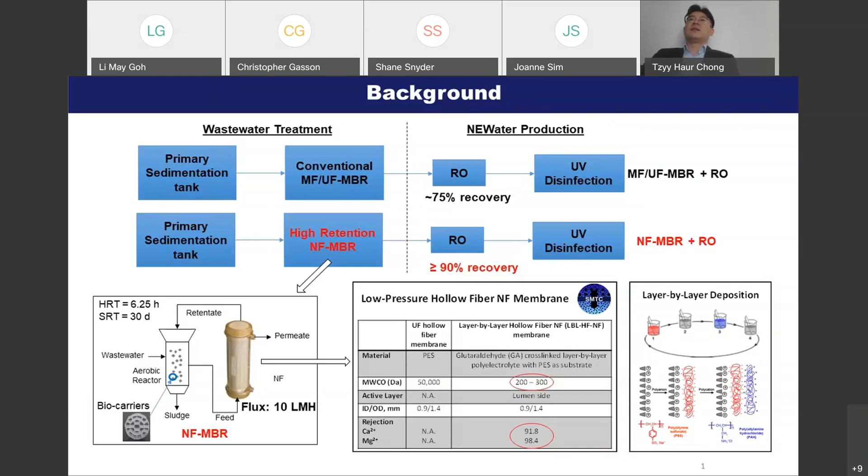So there are two parts in this work. The first part is actually laboratory scale studies where we optimize the NF-MBR. We improve the NF membrane and module for wastewater applications, assess the overall fouling reductions of the system, and perform some techno-economic analysis.

In part 2, which is the current stage we are in, we demonstrate this technology where we scale up the NF membrane as well as demonstrate the NF-MBR at pilot scale.

We have done a lot of optimization work, so below are the optimized conditions of the NF-MBR. The membrane is in an inside-out configuration, used in external mode because we still need to apply a low pressure of about 1 to 2 bar for operation. This hollow fiber membrane has an internal diameter of 0.9 millimeters and external diameter of 1.4 millimeters. This has been optimized to minimize clogging of the hollow fiber when operated with wastewater, and the flux is set at 10 LMH.

The filtration mode we use is intermittent operation with 9-minute filtration and 1-minute backwash, and two-phase flow is applied. In the bioreactor, we actually use a biofilm carrier such that it produces a very low MLSS of less than 1.5 grams per liter. The HRT is set at about 6.25 hours and SRT is 30 days. The feed water is municipal wastewater collected from a domestic treatment plant in Singapore.

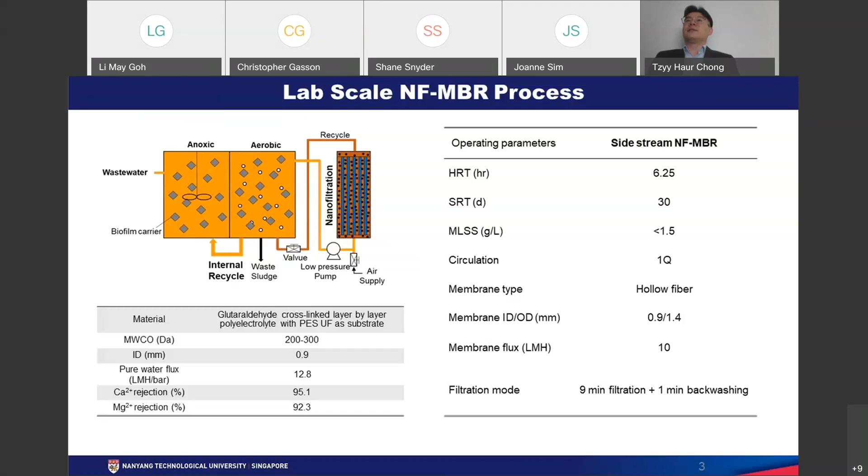This NF-MBR, of course, experienced accumulation of salts such as calcium and magnesium. However, it did not impact the biodegradation efficiency, which removes more than 90% of the organic compounds. We also checked the activity of the biomass, so it does not impact the operation of the bioreactor.

The permeate of NF-MBR has superior quality in terms of DOC removal. It consistently shows a concentration of less than 2 milligrams per liter. Also, it has lower protein and polysaccharide content.

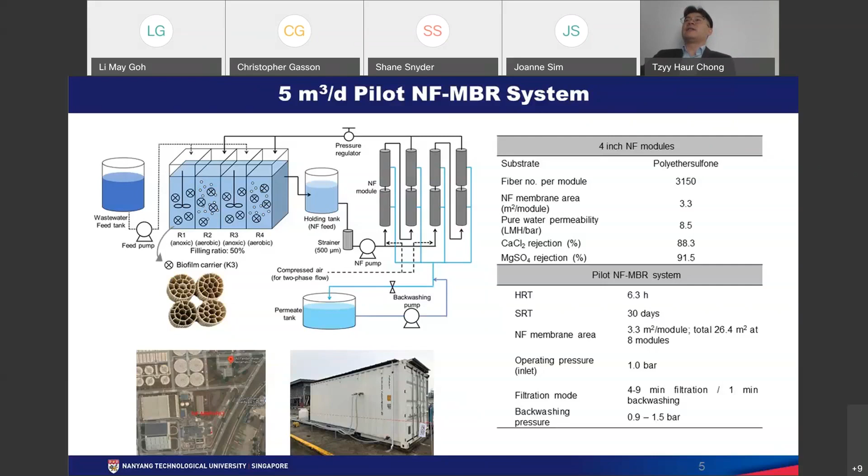We are still in the stage to actually take this permeate of the NF-MBR and run it through the RO.

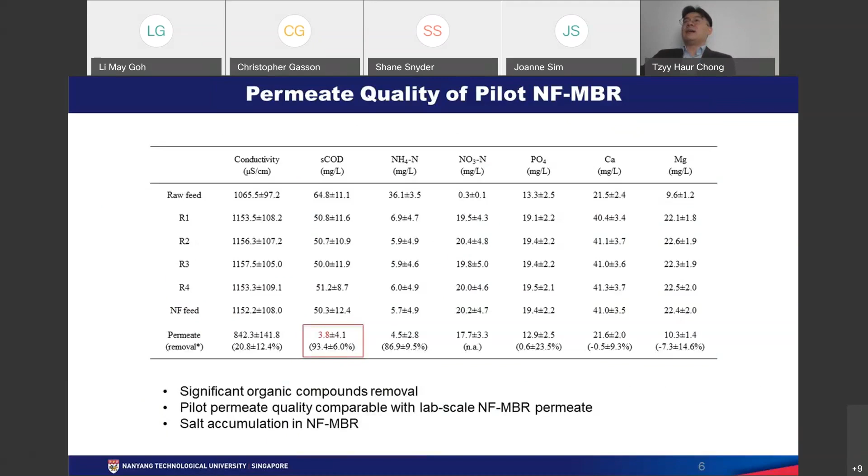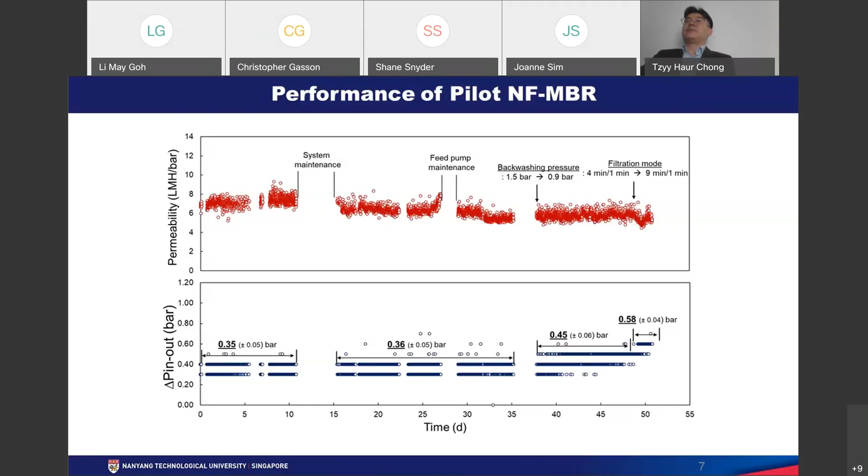So here, the higher energy is due to the RO, because when we want to achieve higher recovery, the osmotic pressure is higher. So it's known that you need to apply more energy in the RO stage to achieve higher recovery. This is the preliminary data we have, and further verification using pilot data is required.

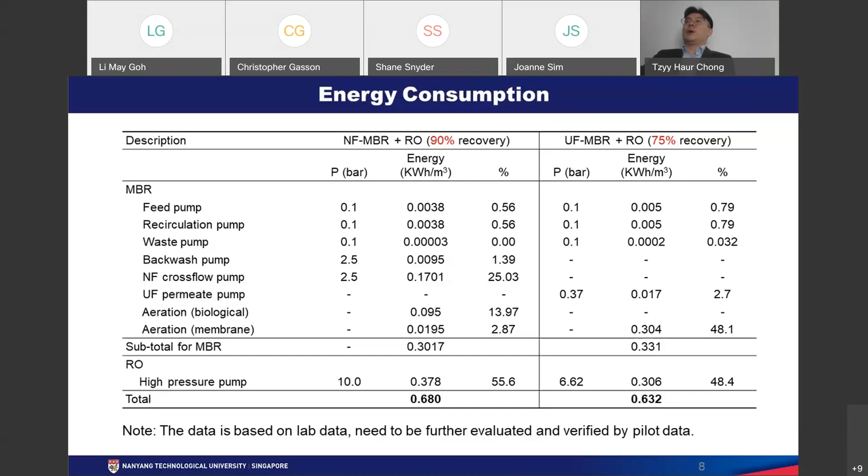So in summary, the Nf-MBR achieved higher organic removal than conventional UF-MBR. This allows the RO to be operated at recovery of greater than 90%. So Nf-MBR plus RO is a feasible option for high recovery water reclamation. Other potential applications, apart from water reclamation, include industrial water recycling, with significant improvement in micropollutant removal.

The benefits you get are high water recovery, lower chemical usage, and less energy consumption associated with RO membrane fouling. It can also increase the membrane lifespan.

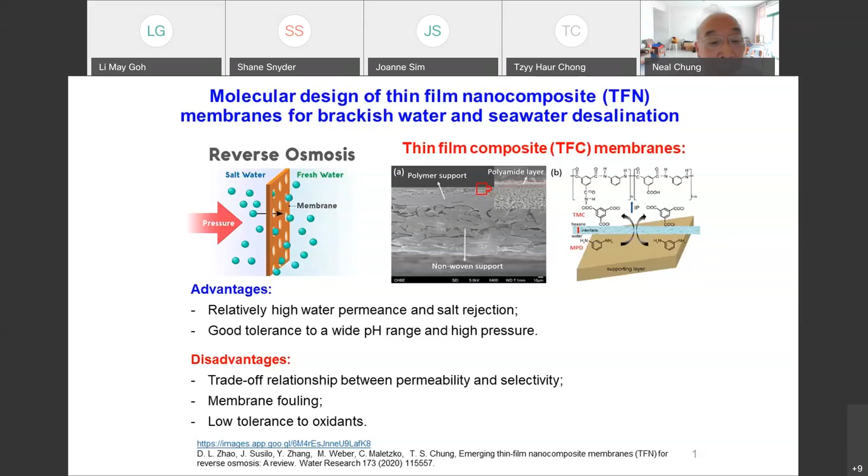Therefore, we try to work on two areas to improve the permeability and chlorine resistance. The first approach is to add amino-functional UIO-66 particles. Why do we choose this particle? Because it has a wide pore size, about 5.1, which allows water to pass through and reject sodium chloride. In addition, it is hydrophilic and has very good stability in water.

The figure shows you the particle we synthesized, about 100 nanometers. We spray the particle first in the polysulfone substrate, then we do interfacial polymerization.

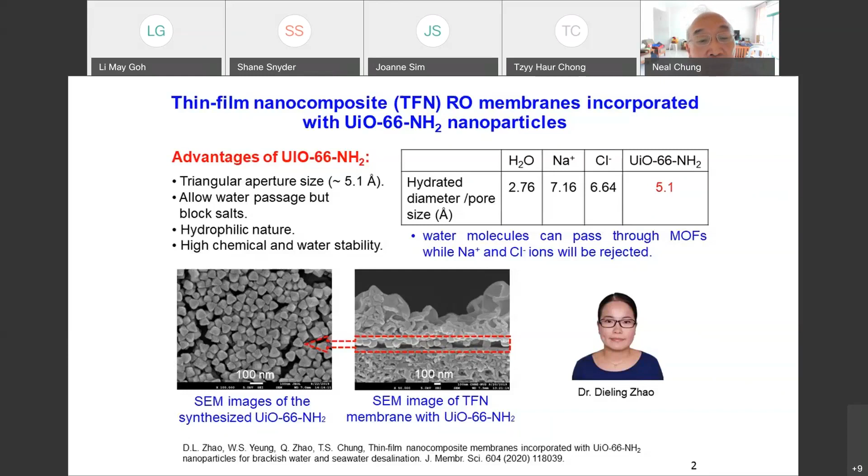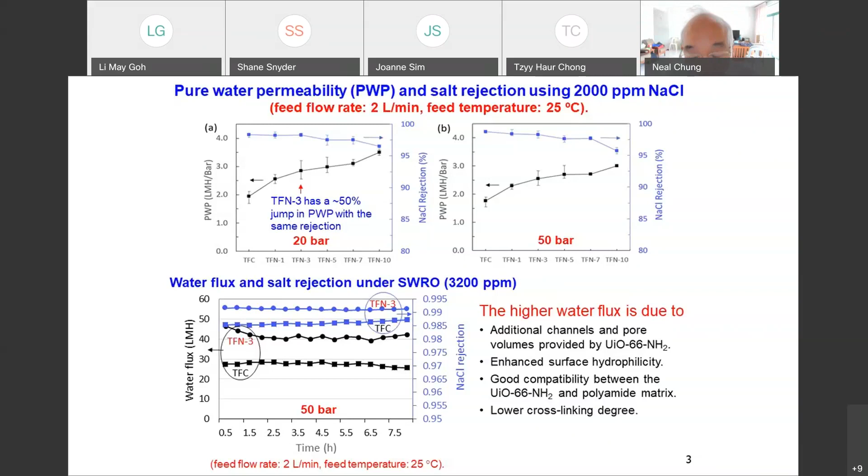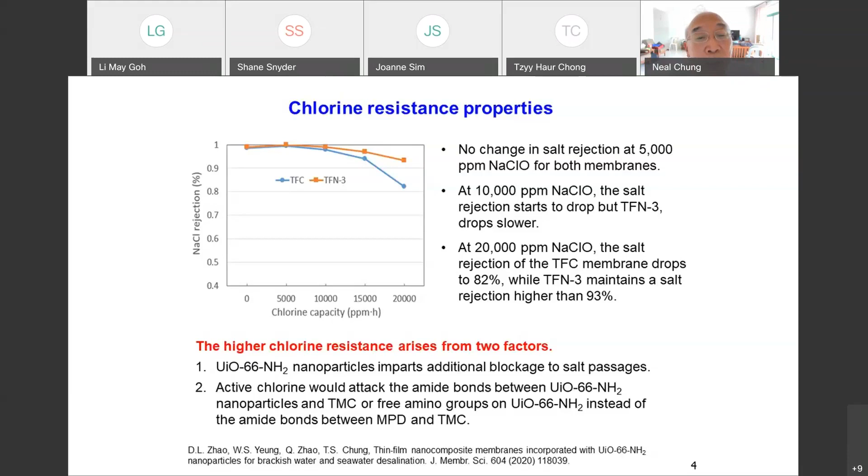So clearly, the addition of UIO-66 improved the membrane's chlorine resistance. Why? There are two reasons. First, the UIO particle rejects sodium chloride. In addition, it changes the chemistry - the active chlorine will attack the amide bond between the UIO and the TMC, rather than the amide bond between the MPD and TMC. As a result, the membrane shows higher chlorine resistance.

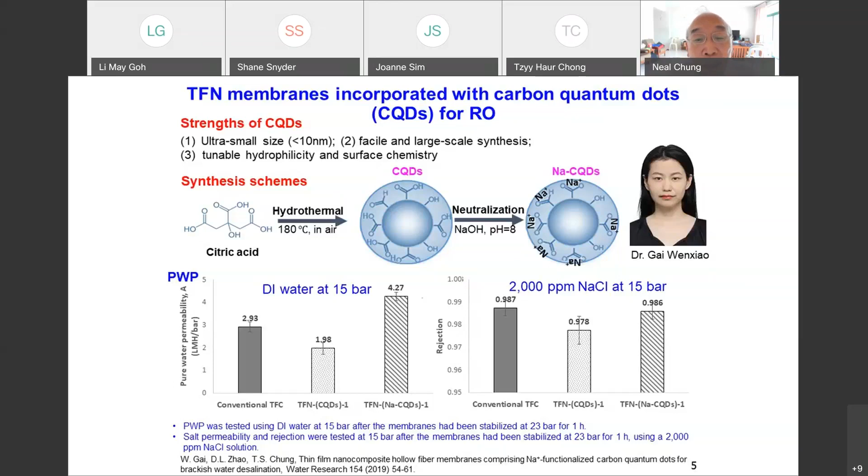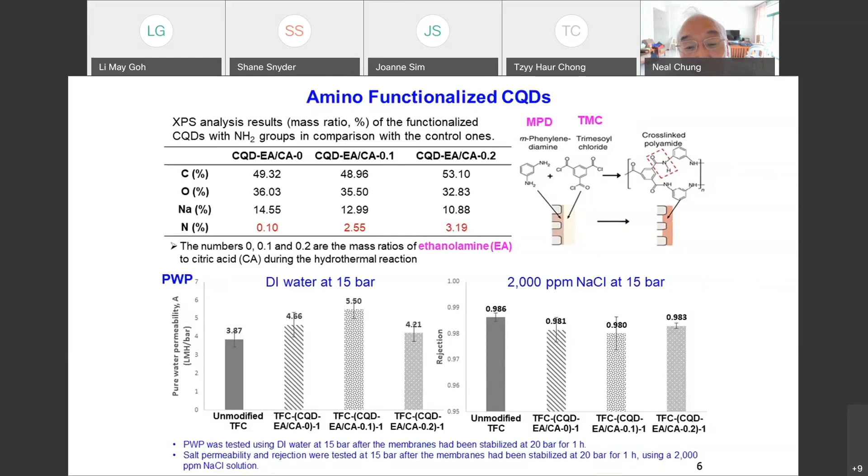The one with the 0.1 ratio has the highest PWP, 5.5, compared to the control at 3.87. The rejection drops slightly from 98.6% to 98%. Next slide.

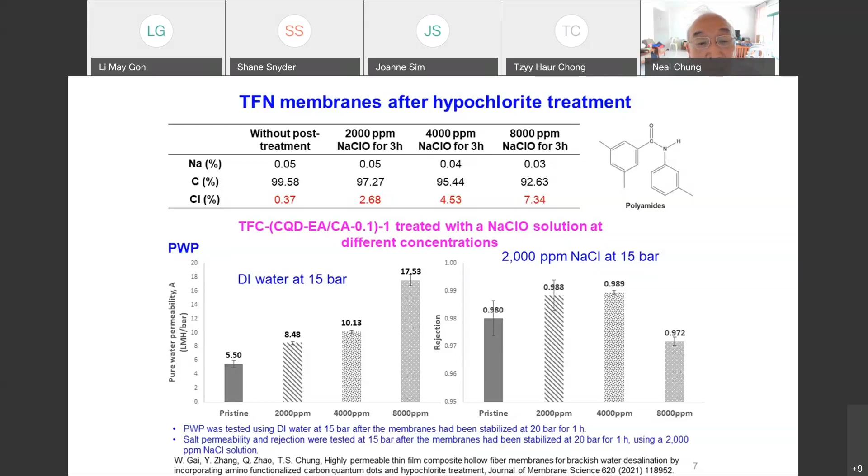If you immerse too much, the flux increases, but the selectivity and rejection reduce. In the case of the 4,000 ppm one, the rejection stays quite good at 98.9%. So this is a new way we developed to make a nanofiltration membrane. Next slide.

So we are at the stage of looking for a partner to commercialize this membrane. One of them is a startup that has already shown interest, and we welcome you to join us.

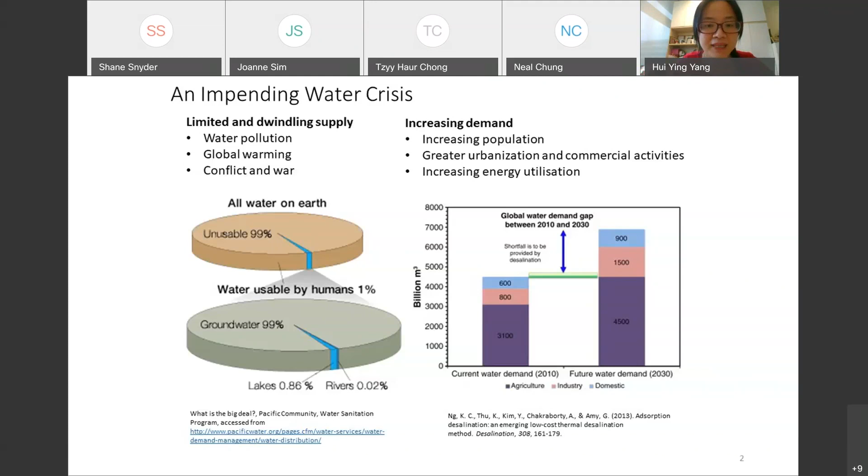Next page, please. Currently, there are many methods for desalination, and desalination has been recognized as the number one solution to tackle the challenge of increasing demand and decreasing supply of fresh water. As Prof. Chung presented, the main technology is membrane technology, which has been developed for over 100 years, and many populations have benefited from it. There are reverse osmosis membranes and forward osmosis membranes as well.

And associated with the membrane technology, there are electrodialysis solutions, nanofiltration, and so on. Recently, people also utilize graphene as a new material to treat water.

The second group of technology people utilize to treat water is thermal technology. There are multi-stage flash distillations, vapor compressions, multi-effect distillations, and so on. A group in NUS is also trying to utilize thermal methods to generate dew liquid from desert or very dry areas, and that is a new direction for thermal-based generation of water.

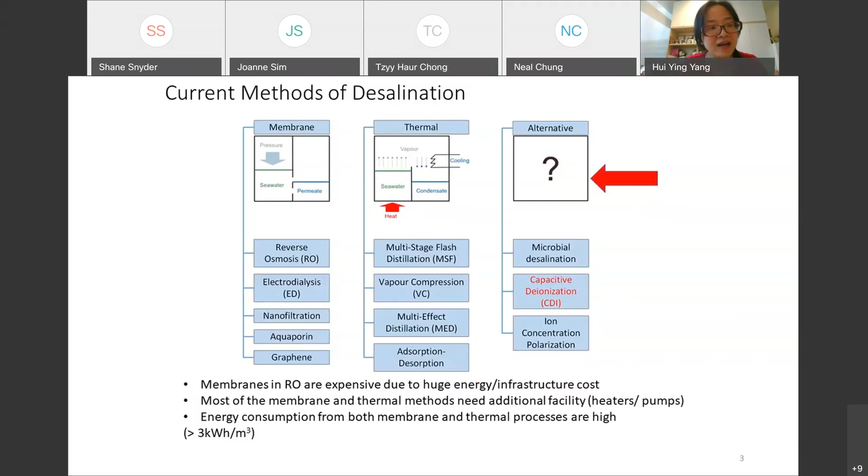Energy consumption for both membrane and thermal processes is as high as more than 3 kilowatt-hours per cubic meter, and that is the current situation.

Capacitive deionization is one of the major alternative solutions humans utilize in daily life. Basically you have two plates, one positive and one negative. When seawater comes in, negatively charged particles will go to the positively charged plate, and positively charged particles will go to the negatively charged plate. That is as simple as a high school student can understand, and that is the basic principle of capacitive deionization.

There are a few advantages and disadvantages for capacitive deionization. The main advantage is that only a very small value of direct voltage or current needs to be applied to the electrode, because above 1.4 volts the water is going to be split into hydrogen and oxygen. So anything you apply to water in terms of voltage must be below 1.4 volts, meaning only a small amount of energy is required for CDI.

Oppositely charged ions will be absorbed on different electrodes—positive attracts negative, negative attracts positive, and that is the basic mechanism. However, with this kind of system attracting oppositely charged ions, you can imagine that once the surface is covered by one kind of charge—for example the negative plate covered by positive charge—when there is sufficient positive charge to cover the entire surface, the process stops. That is the limitation on capacity. The electrodes regenerate because when you short circuit, the ions lose the attraction force from the plate and go back into the water, and that is the regeneration process.

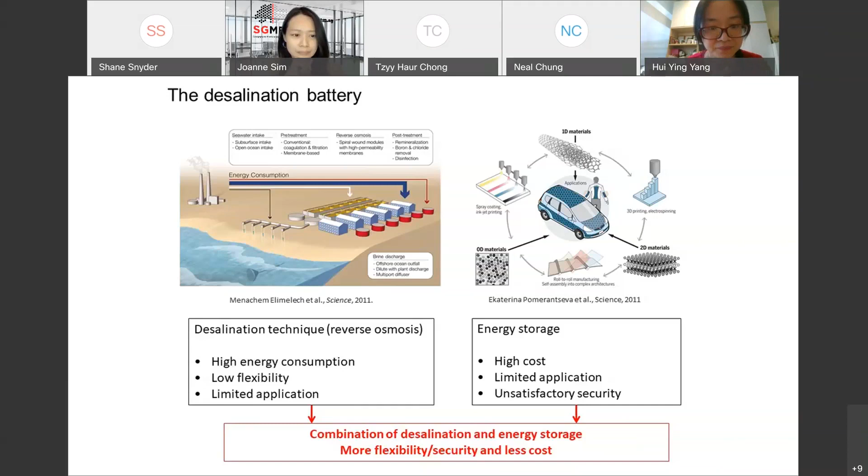We can increase the capacity significantly. Previously, with a purely CDI system, we could only remove about 17 or 20 milligrams per gram based on electrode weight. But with this new battery-based material, we can increase the capacity by one order of magnitude, and we have enabled ion selectivity that doesn't exist in any other water treatment technology.

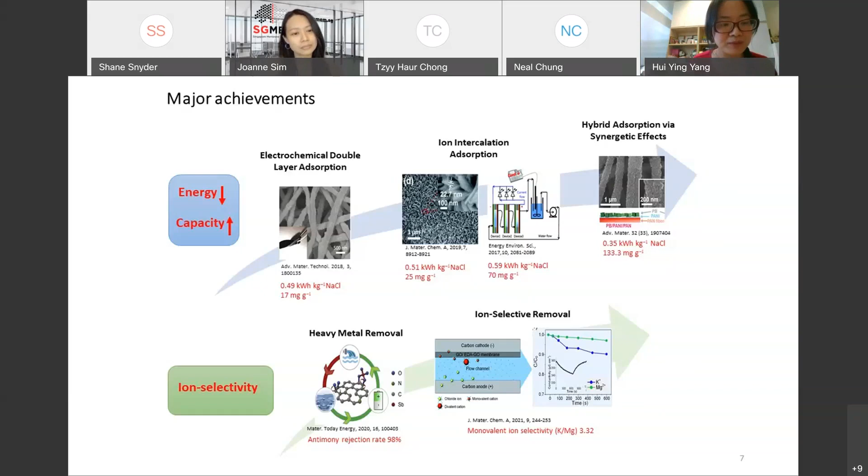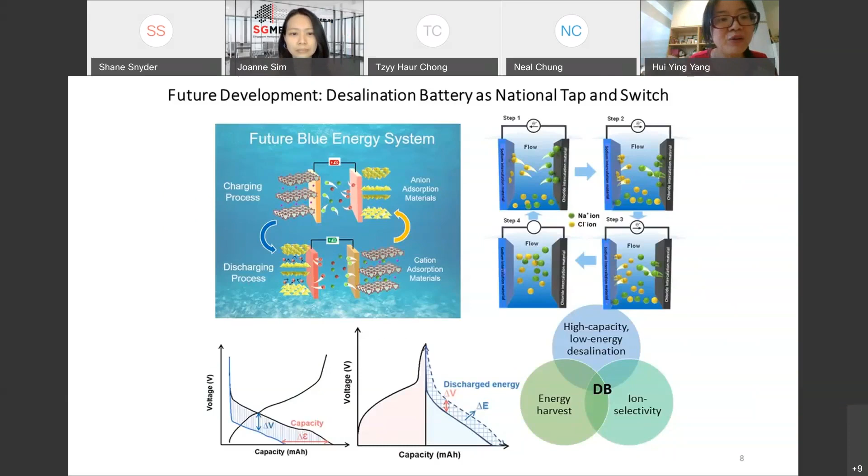We utilize the desalination battery with high capacity and low energy cost, and we also enable the system to have an energy harvesting effect. Because we only take in sodium ions, when we release them we generate a current flow, which acts directly like a sodium ion battery.

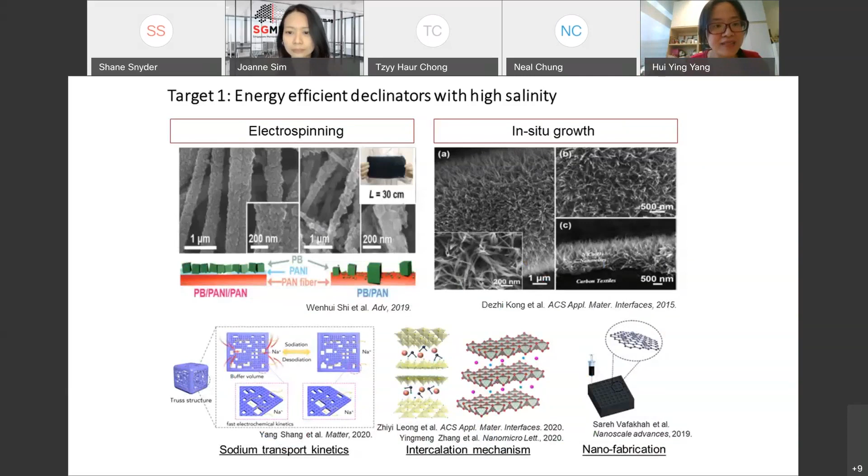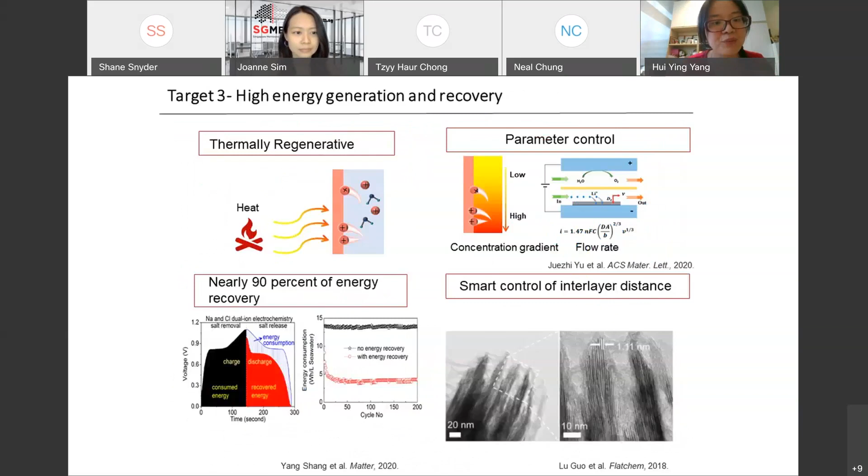In the future, we have a few targets in our research project. First, we want to enable energy-efficient desalination at high salinity levels. Then we want extremely high and accurate ion selectivity. We also want high energy generation and recovery. So in the future, we want to create a sustainable, low-cost solution for precise control of ions in energy storage and desalination systems.

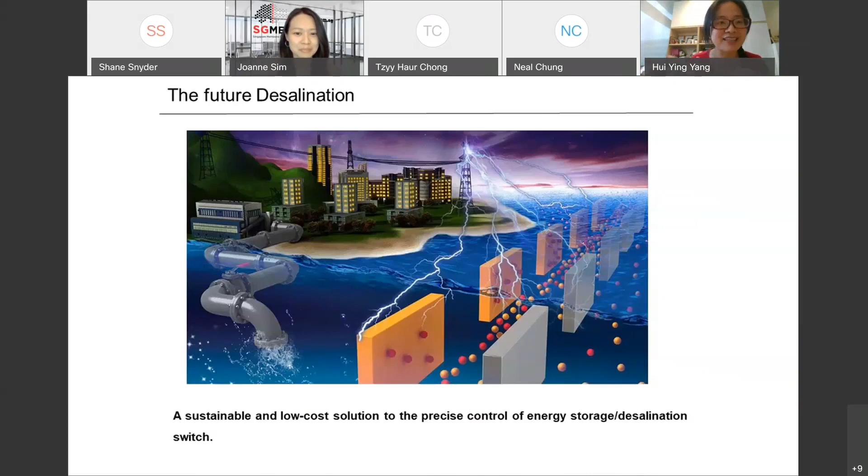I'm sorry, I think my slides were a little long, but I want to thank PUB and NRF for the funding support, and thank you for your attention today.

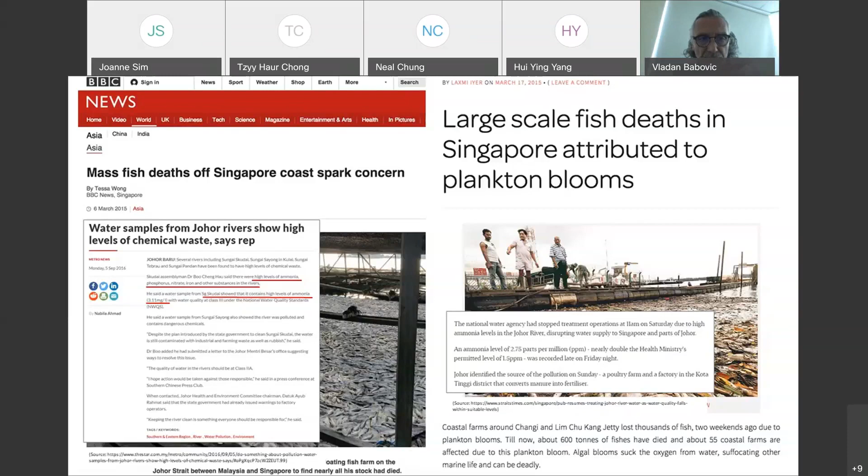Maybe we can move to the next slide. Yes, so we did quite an extensive data science exercise and combined both the data that were collected in the field.

This is sometimes a prohibitively expensive exercise because you have to send vessels. Vessels need to take samples, then these samples need to be brought back and analyzed in the lab. So your frequency of visit is not very high. You're taking spot samples and so forth.

So in order to supplement this, we have also introduced what we call surrogate data, or a highly reliable computer model that would interpolate the data in space and in time.

So the first step you do is carry out correlation analysis and see how nitrogen, phosphorus, PO4, suspended solids, total organic carbon correlate with chlorophyll A, dinoflagellates, etc., leading to total percentage of phytoplankton.

But that is only part of the story, and this does not give you causality. It gives you correlational strength between these signals, but it doesn't give you a cause of where or when the bloom will be, or particularly the forecast of when the bloom will happen.

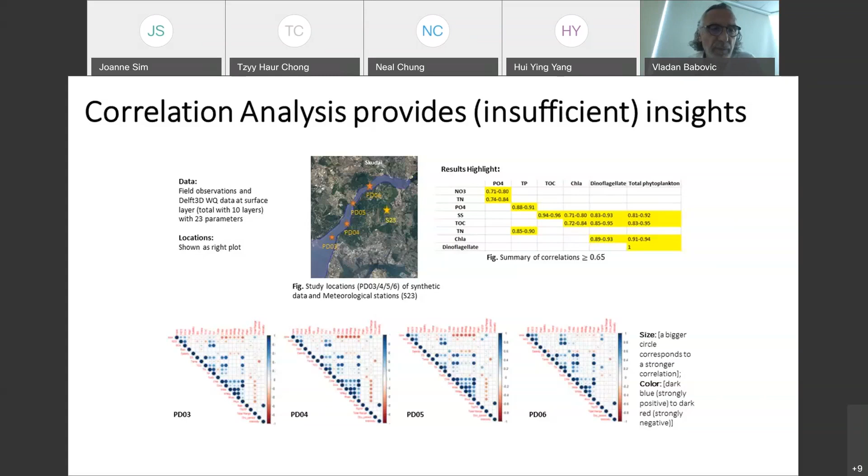So we moved to machine learning to help us in this. We took two different approaches, and I apologize to those familiar with machine learning for introducing this in such a way, but maybe it will be helpful for others.

We use something called supervised learning. In supervised learning, you need to show examples of inputs and outputs. So in our context of algal bloom, this would mean we would have to have samples of many algal blooms to actually say, hey, these are the intensities, etc.

Which is difficult. But here's an example of how supervised learning works: vending machines. How does the vending machine know if the coin you insert is 10 cents, 1 cent, 5 cents, or 25 cents? It should be a very sturdy environment.

So what if I provide lots of examples, lots of coins, in a vending machine? What the machine learning algorithm needs to do is just learn the separation lines that separate different classes of coins.

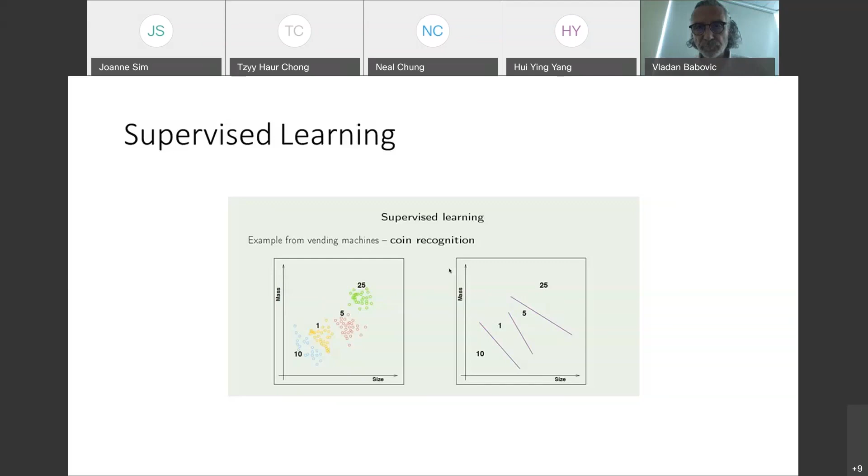And on the next slide, I'm showing an example of unsupervised learning. What does unsupervised learning do? It says, hey, you know what, I really don't know what these samples are all about, but perhaps this machine learning algorithm can help me establish different classes.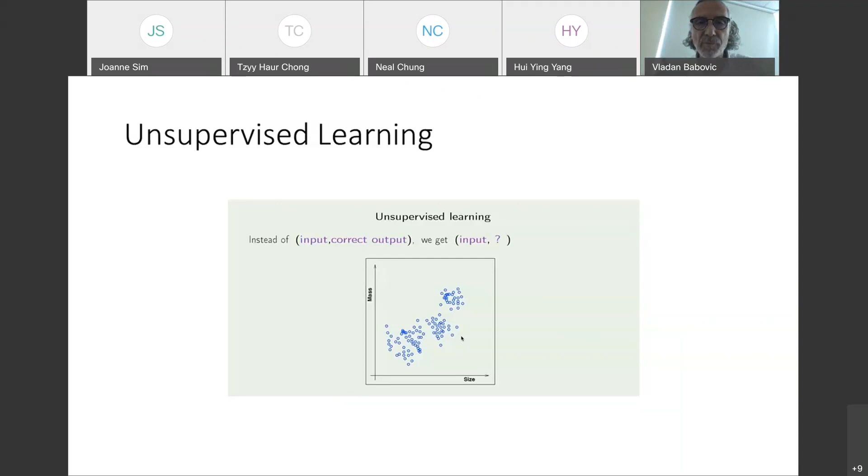So here I'm looking at the same example of coins I just used, and it seems like I can clearly see 3, but possibly even 4, distinct classes. So this is what unsupervised learning does for us - it reorganizes things for us, it helps us dissect similarities between the objects being classified.

But then when you do this in the first step, you start asking yourself, how does this translate to risks? And you can see, okay, maybe there's a low risk condition, a relatively high risk condition, etc.

So we started digging deeper into these clusters that have been identified by self-organizing maps, by our unsupervised machine learning algorithm, and then tried to interpret the events by what they are characterized.

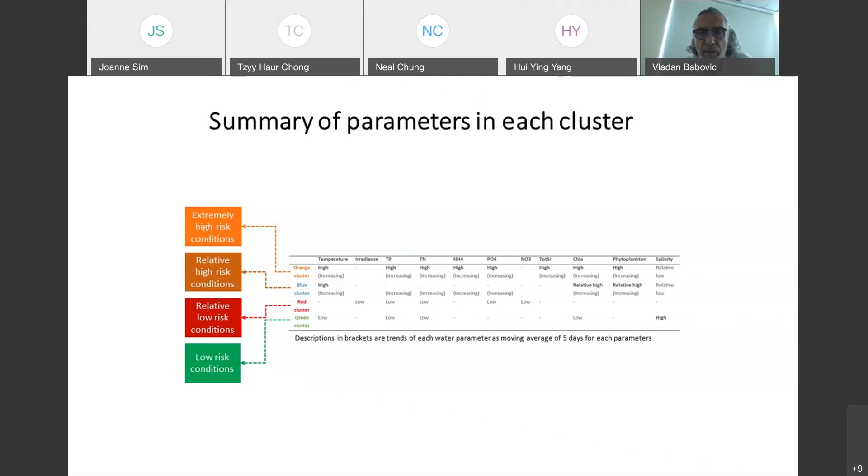Then you use this, since you know that in each class you have no risk, low risk, medium, etc., you ask yourself: can I now show this to another kind of machine learning algorithm? In this case it's supervised, because I know what these classes are - low, medium, high risk, etc.

And we use two techniques: one is called CART, a decision tree, and the other is called random forest, to actually learn the thresholds which determine different kinds of behavior in the environment.

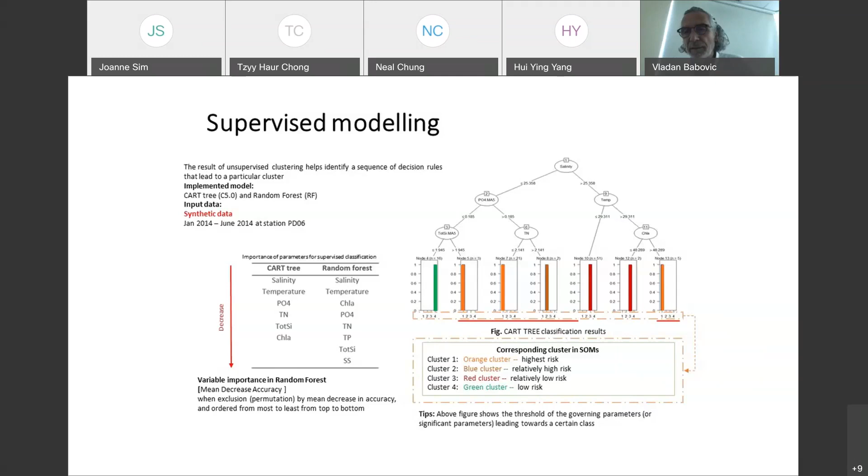So in this case, this is a CART decision tree. You can see that various clusters have been identified, and these thresholds are also identified.

So what does this really mean? This means that the clustering - unsupervised clustering and decision tree together - actually lead to advice and establishment of a progressive monitoring program.

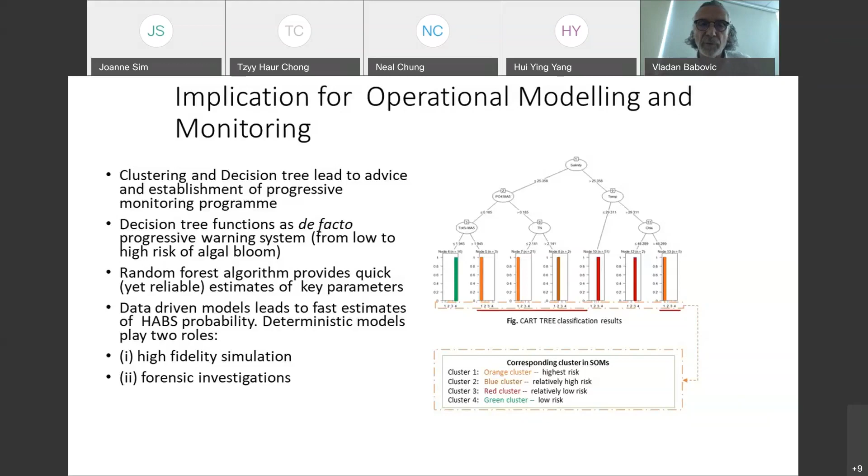This is a progressive warning system from low risk to high risk of algal blooms, and this is coupled to trigger different forms of surveillance and monitoring and decisions. If you remember from the introduction, we have imperfect knowledge about what happens in Singapore, what happens in Malaysia, which factory may release something. So we rely on parameters that are relatively easy to monitor, but these would trigger different kinds of models that perform computation analysis at higher fidelity.

The integrated operational response system to bloom warning uses different clusters, different classes to lead action. If you're in the orange cluster, you should go for spot sampling, fly drones, and use high fidelity algorithms. But if you're in a green cluster, low risk, no action is needed. So this whole system becomes very much about informed decision making.

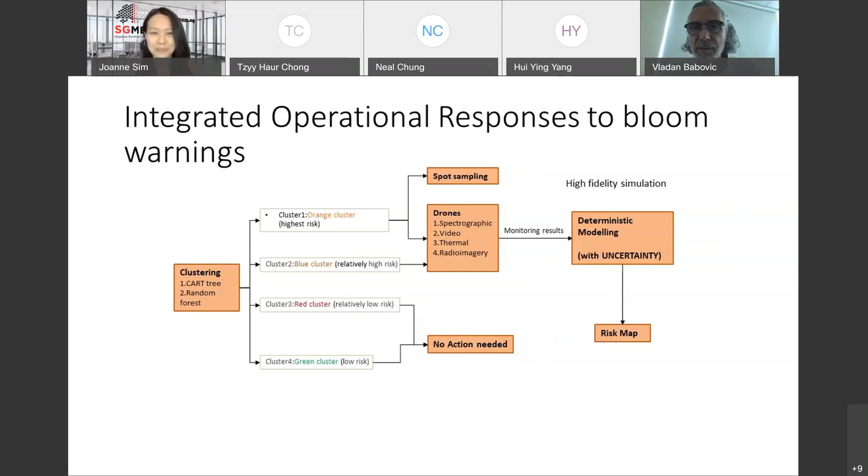Our earlier presentations by Prof. Chong, Prof. Chung, Prof. Yang, and Prof. Babovic showcase the latest research in the water sector, which is the genesis of future technological applications and solutions. Now our next segment will address the gap that exists between research and commercialization, driven by one of our National Translation Centers on Separation Technologies, the START Center.

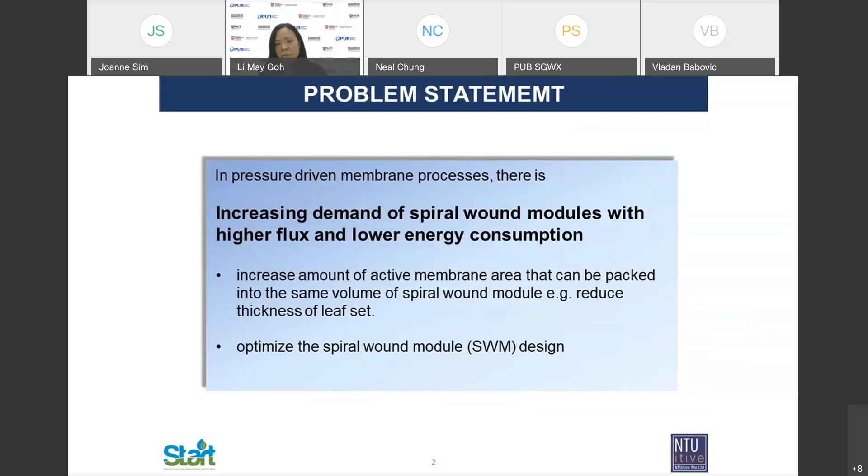As many of you would know, in pressure-driven membrane processes there is an increasing demand for higher flux, because this leads to lower energy consumption. There are many ways this can be achieved. For example, you can increase the amount of active membrane packed inside a fixed volume of spiral wound module. Another way is to optimize the chemical formulation, or to optimize the spiral wound module itself. The reason we are looking into this innovation is we believe the reinforced membrane is one of the means to achieve this goal of improving flux.

A little bit of background on why we got started on this project. Back in 2018, START had a task to evaluate a couple of patents from NTU which were about to lapse, and this patent from SMTC was identified as having potential to commercialize and scale up. This technology is about a lab scale fabrication of reinforced membrane, particularly for PRO, pressure retarded osmosis, applications.

It's about casting the polymer dope directly onto the mesh instead of the polyester backing. This was done because it reduces the concentration polarization, which is critical for PRO applications. So we took this technology and attempted to scale it up on the industrial size casting line.

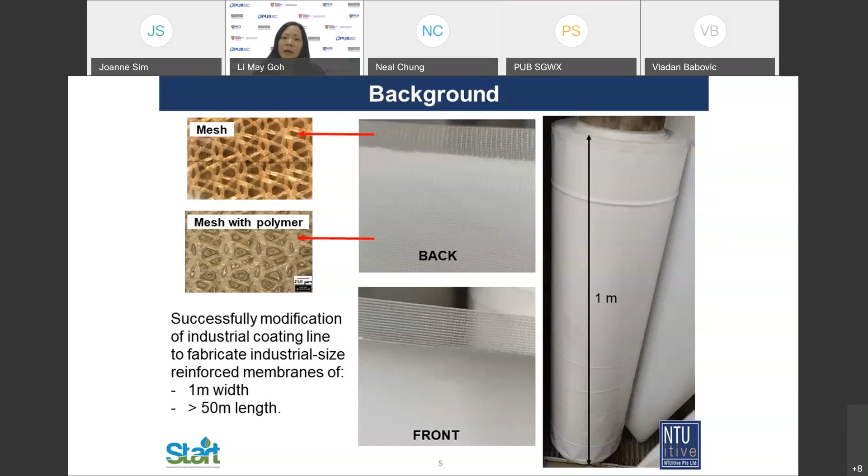A quick timeline on what happened in 2018: we attempted to scale up the reinforced membrane. Overcoming the difficulty, we were able to coat the reinforced membrane on the industrial size casting line with a new process, and then roll it into the spiral wound element. At the end of 2020, we filed a patent on the new process for all types of pressure-driven membrane processes.

In terms of results, we have validated the coupons to withstand up to 35 bar for seawater desalination. We also validated the performance at brackish water condition, with more than 99% rejection, and validated the spiral wound element for up to 15 bar.

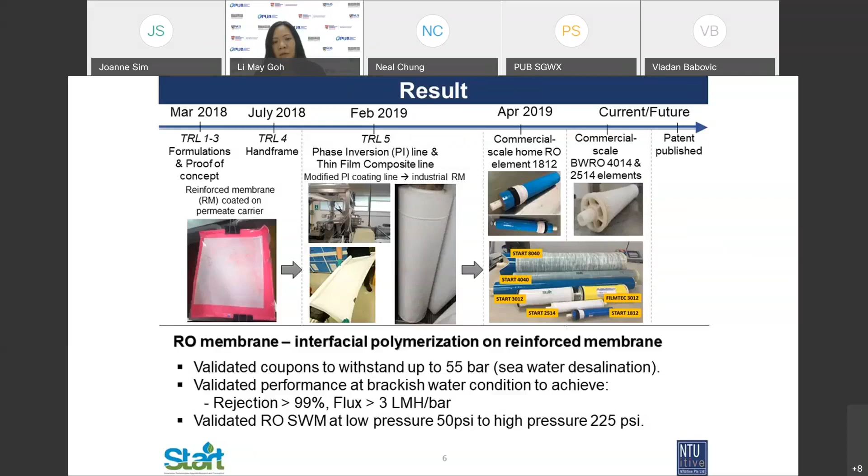In terms of applications, we believe this reinforced membrane has a lot of potential for all pressure-driven applications: UF, MF, NF, RO, FO, PRO, as well as membrane distillation. We believe this will be the path to the next generation spiral wound module.

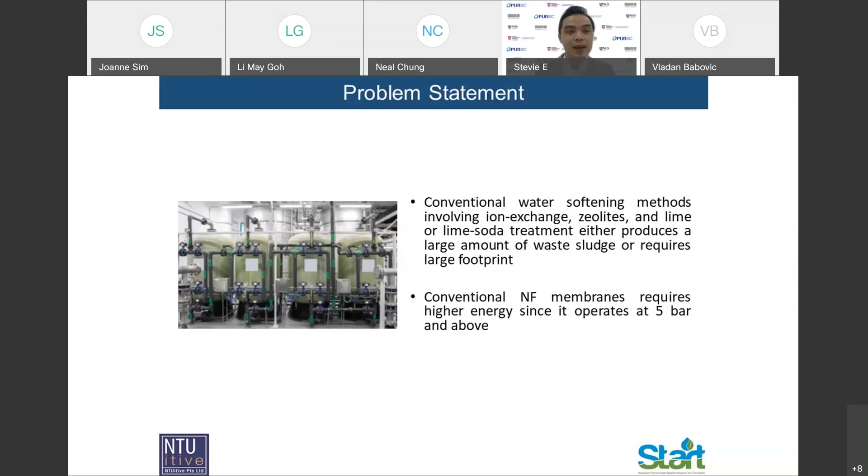Before we move further, I'd like you to know briefly the idea behind this low-pressure nanofiltration membrane. It was invented because existing conventional water softening methods, be it ion exchange, zeolite, or lime soda treatment systems, either produce a large amount of sludge to be handled or require a larger footprint. Conventional nanofiltration membranes also require high energy consumption, since they operate at 5 bar or above, depending on the feedwater TDS.

This low pressure nanofiltration membrane was invented by Professor Wang Rong and Dr. Liu Chang from SMTC. The key feature of this membrane is that it's able to operate at feed pressure of 2 bar or less, and is served mainly for water softening purposes.

For this technology translation, we faced 3 main challenges: the first is cost-effective raw material, the second is the chemistry and process review throughout the upscaling from a small size into a bigger size, and the third is the module design. We also faced some challenges with that.

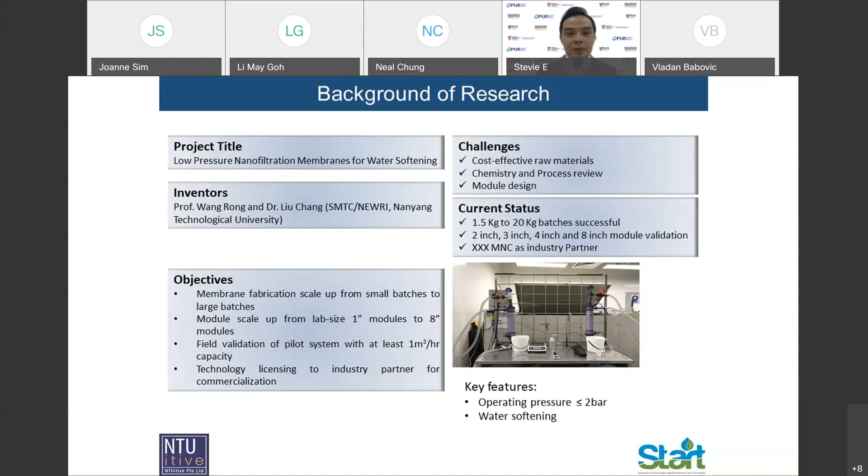Our current status is that we successfully fabricated the substrates, manufacturing from 1.5 kg up to 20 kg batches. We have done module validations for NF membranes from 2-inch diameter, 3-inch, 4-inch, and up to 8-inch commercial size diameter for the NF module. We also have different MNC work with our industrial partner for this particular project.

For this technology translation, mainly we are talking about manufacturing feasibility. For these NF membranes, we have to tackle 4 main approaches, firstly we have to optimize the substrate fabrication. Thereafter, we move into optimization of the selective layer formation, which in this case uses a layer by layer process.

After that, we move to module fabrications from different sizes, from smaller 2-inch up to 8-inch diameter, and then eventually we will need to perform different kinds of tests at the modular level to see the consistency of the product. So the challenges we face: first, to replicate and repeat the substrate parameters where we get the data from the lab research and compare it to the current pilot setup in our start center. Secondly, to maintain similar performance by switching from laboratory grade chemicals into industrial grade chemicals. This is not only to make sure compatibility from lab grade to industrial grade chemicals, but we will also see huge cost saving in terms of future manufacturing mass capacity.

For our current status, the substrate fabrication process has been scaled up in the start center from a 1.5 kg batch up to 20 kg, as I mentioned before. And we have module fabrications that have been scaled up from 2-inch diameter up to 8-inch commercial size. Our layer by layer process has been optimized for different modular sizes.

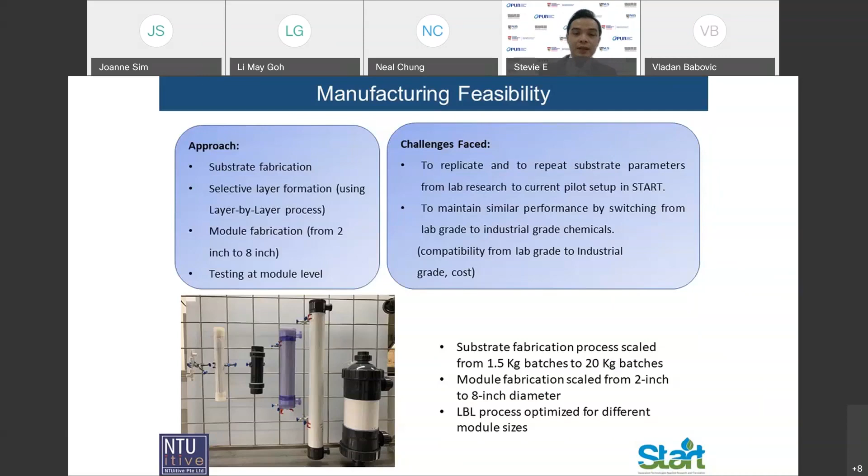Next, changing the raw material selection. If you look at this slide, the photo on the left hand side is the cross-sectional hollow fiber substrate produced by pure analytical grade chemicals, and the right hand side is the cross-sectional hollow fiber using industrial grade chemicals. In terms of internal diameter and outer diameter, they are quite close to each other, and we have successfully done the process validations using cheaper industrial grade chemicals, which eventually will give us lower cost at manufacturing scale. The substrate characteristics have been successfully replicated, close to the high purity analytical grade chemicals.

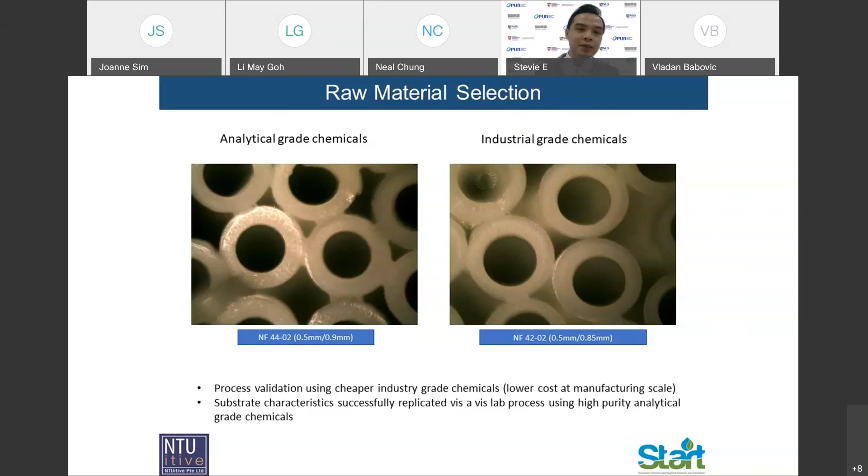By comparing the physical properties, the ID and OD alone may not be enough to justify the performance, so we need to proceed to test the substrates, comparing the industrial chemicals and the lab grade chemicals.

The test conditions were set at 2 bar, and we tested with two different kinds of solution. First is the PWP, which is pure water permeation, using deionized water. Second is the SWP, which refers to salt water permeation, where in this case we fed 1000 ppm of magnesium sulfate solution at 2 bar feed pressure.

Looking at the light green bar compared to the light blue, what we can see is that industrial grade chemicals show comparable performance on permeability, and in fact comparable performance on divalent ion rejection as well. These successful replications suggest that manufacturing on a large scale is feasible.

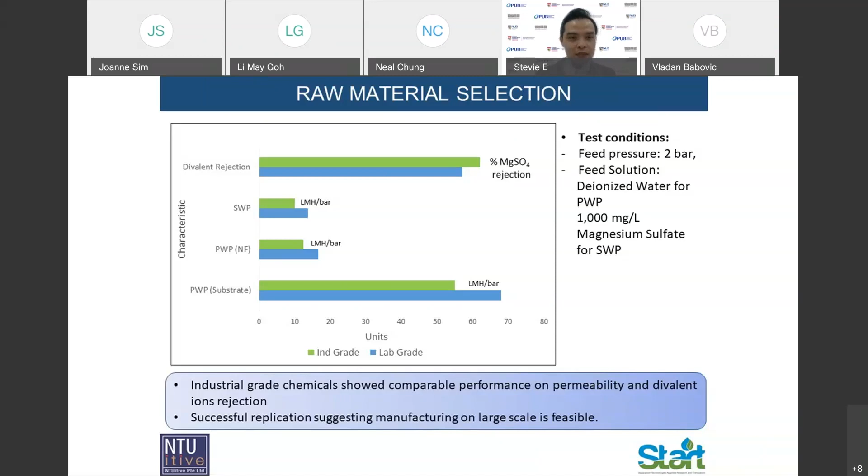The next challenge is the semi-dynamic method, where we made some modifications to the process. If you look at the photo on the top left, we are using a vacuum assisted method to lift the chemicals into the hollow fiber membrane to form the coating. But this method is only applicable for smaller diameter modules. When we apply this method for 4-inch or even 8-inch diameter, it doesn't work. So we had to modify the system from vacuum assisted into pressure driven, maintaining a certain pressure and velocity to make sure the coating on the substrate is evenly distributed.

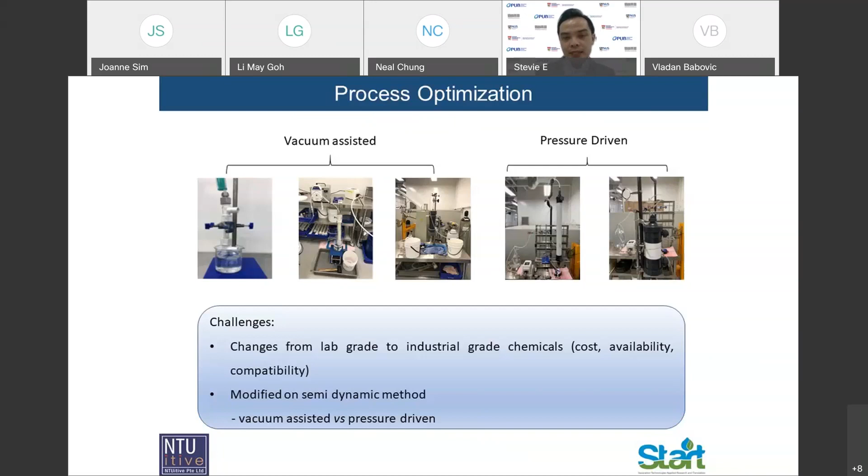Having the layer by layer process optimized, we then move into module fabrication and testing. In the photo, we purposely used clear PVC pipe, or in fact white PVC - commercially available module housings, benchmarked against a commercial product, an existing UF membrane that they are using. We performed different longer term tests to confirm the stability and repeatability of the substrate and the LBL process we have performed.

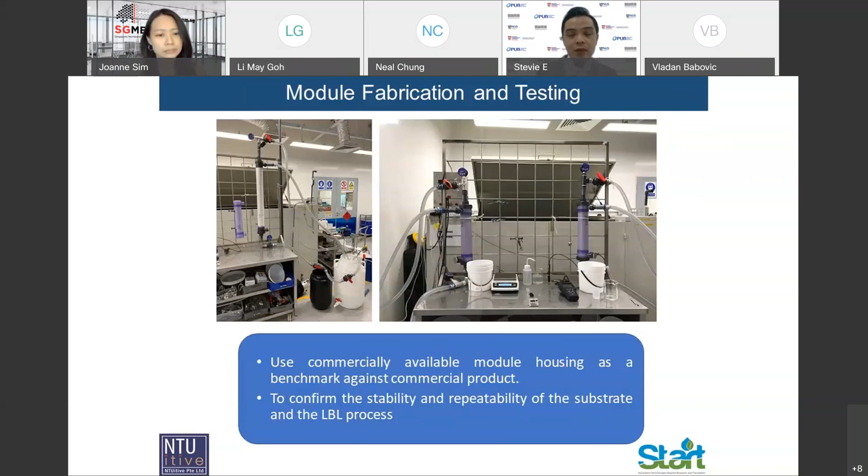Coming to the test results, in this diagram we have plotted out the different module dimensions of the NF module that we have fabricated in the start center, from glass tube, 2-inch diameter, 3-inch diameter, 4-inch diameter. We have produced two different lengths, 0.5 meter and 1 meter, and the largest we have produced so far in the start center is an 8-inch by half a meter length NF module.

So this diagram, we have tested it with two types of solution: deionized water for pure water permeation and 1000 ppm solution for divalent rejection test. What we can see is that across the smaller size glass tube up to 8-inch diameter, we're able to achieve, from the top left diagram, pure water permeability. Even at 8-inch diameter, we're able to achieve 12.1 LMH per bar of water permeability.

If you look at the lower left of the diagrams on the divalent ion rejections, from a glass tube size up to 8-inch diameter, we are achieving more than 80% divalent rejections. And even at 8-inch diameter, we have achieved 11.6 LMH per bar permeability. So with the optimized formulations, spinning process, and our modified LBL process, we're able to achieve the project target of more than 10 LMH per bar permeability and more than 80% rejection.

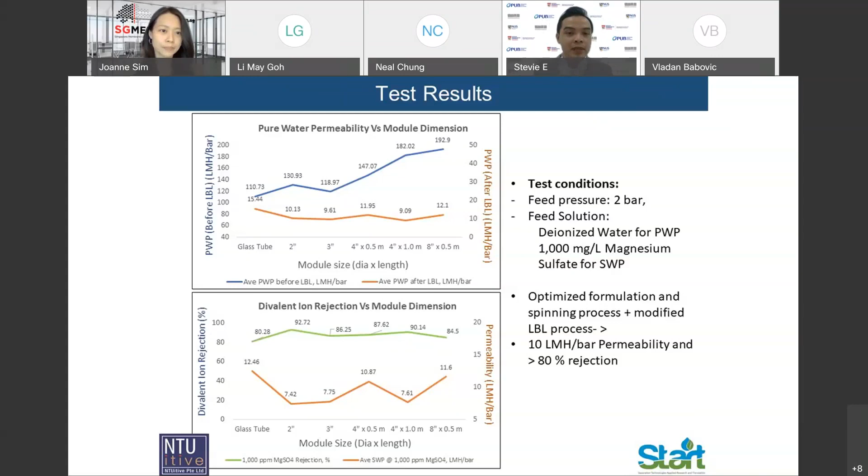Next, for a longer term test that we did on the NF membrane, similarly we apply 2 bar at the 5000 ppm mixed salt solution, and over these 100 hours of the test, what we observe is that the permeate flux we're able to achieve is about 7.1 LMH per bar across these 100 hours, and the total rejection we can achieve is on average close to 82%. If you look at this at the first few hours, there's a slight dip on the performance. That is due to one or two fiber breakage, which after we rectify it, it goes back to normal thereafter.

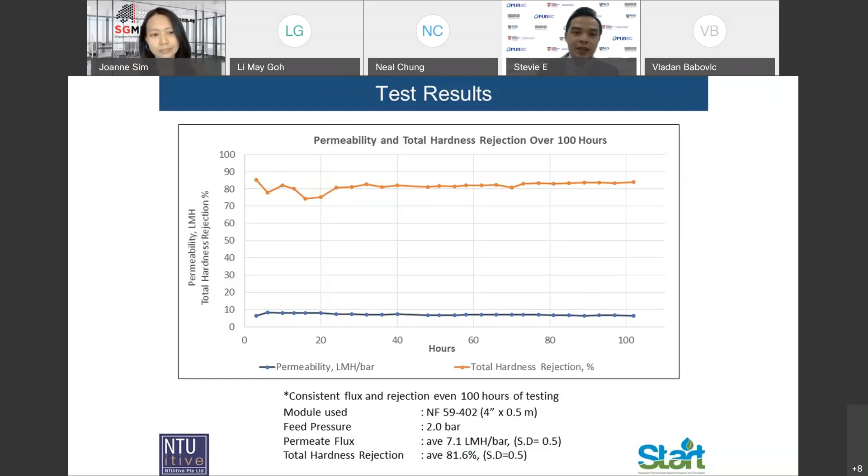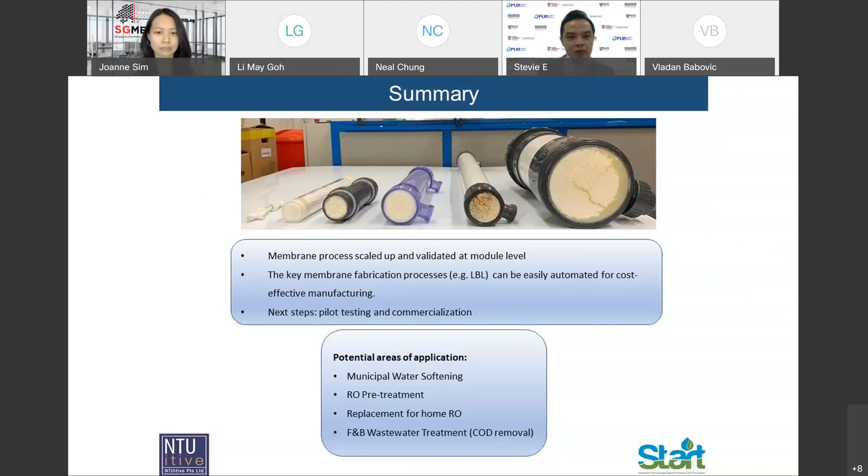Next, so the summary is that the membrane process has been scaled up and validated at modular level. The key membrane fabrication process, which in this case is LBL, can be easily automated for cost-effective manufacturing. Our next step, perhaps we can do more pilot testing at different kinds of water, and then we are in fact ready for commercialization. The potential areas for this application will be municipal water softening, RO pre-treatment, replacement of home RO, and food and beverage wastewater treatment, in particular for COD removal.

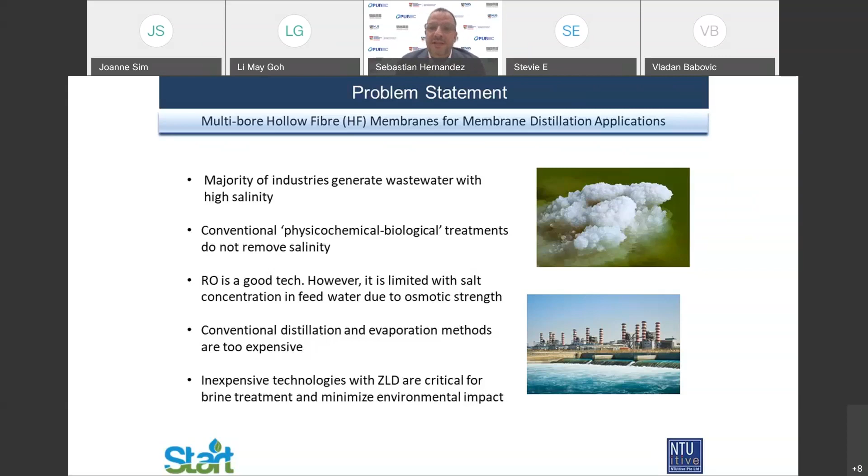So, like I said, the inventor is Professor Neal Chung, and the idea is that we have hollow fibers that instead of one channel through this fiber, it has 3 channels. It's a tri-bore hollow fiber membrane.

This gives us a high surface area, about 30 to 40% increase in area that increases the contact between the salty water through the membrane, and you can have better, more flow of the water, of the vapor through the membrane to produce pure water. So it's a reduced footprint because with higher membrane area, you can have less membranes in the plant.

From this invention, it has higher vapor flux. It produces between 8 and 10 LMH, compared to 4 to 6 LMH for the single bore, and it has a higher efficiency.

Also, given the geometrical structural part of this membrane, the idea is that the membrane has a very structural stability. It can containerize, it could reduce the footprint, like I said, and it's important because the footprint will be lower. And this will improve the ease of troubleshooting.

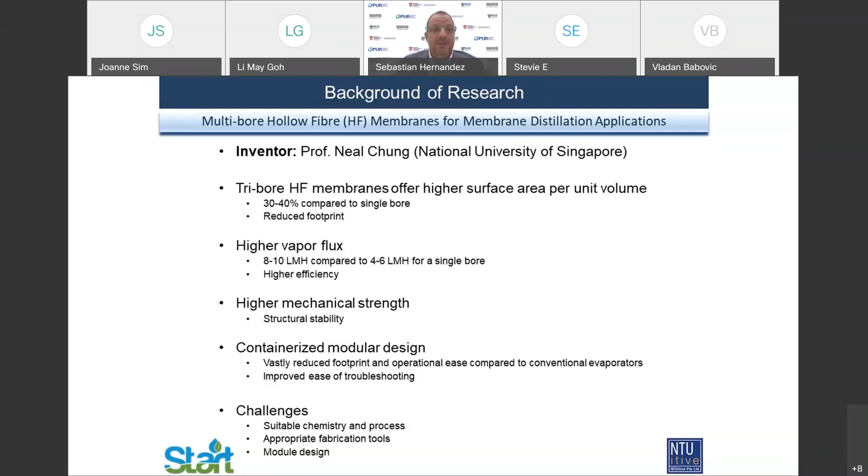The challenges, of course, are the suitable chemistry and process, because you have to change a little bit of the chemistry of the materials, of the compositions, to get a suitable membrane that has 3 bores, and the fabrication tools that give you the right shape of this membrane. The module design will go through the same as the single bore membranes, but like I said, it will increase the area.

So in the current status, we are in phase 3. We are going from 1.5 kilogram to 25 kilogram batches, and we are programming now to 50 kilogram batches. The production is successful up to now. We are doing the pilot fabrication in process, and most of this evaluation of the performance is done in-house. There is a collaborator from Ngee Ann Polytechnic, and we are doing also a pilot scale evaluation with an industry partner, MEMSIFT Innovations.

At this moment, we are producing 2-inch and 4-inch modules, which will give us a better performance, and we can test it in the field.

And also, these modules are working with vacuum membrane distillation, where one of the sides of the membrane is in vacuum, which promotes the evaporation of the water on the other side, and only the water vapor will go through one side and be filtered to the other side. So the idea is that we already validated the vacuum membrane distillation. We tried other systems, but this is the one that really worked.

And as you can see here in the figures, we went from the laboratory scale mold at around 1.5 inch to a commercial scale of 4.4 inches.

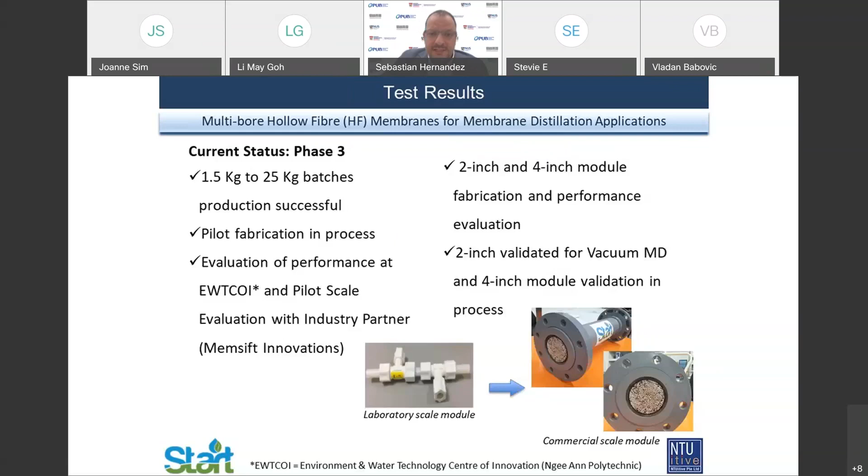So with this, we get to an agreement between START and MEMSIFT Innovation to do the pilot scale evaluation of these membrane distillation membranes. And the idea is to get to the performance of these tri-bore membranes against the commercially available membrane. That will be the next step.

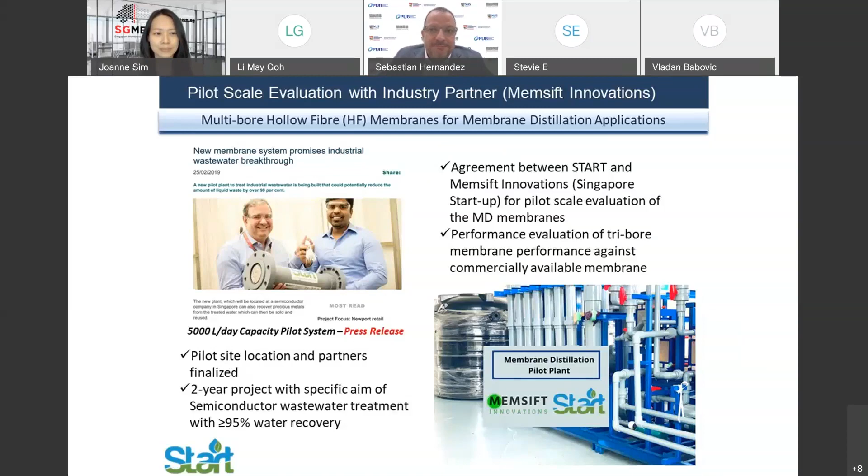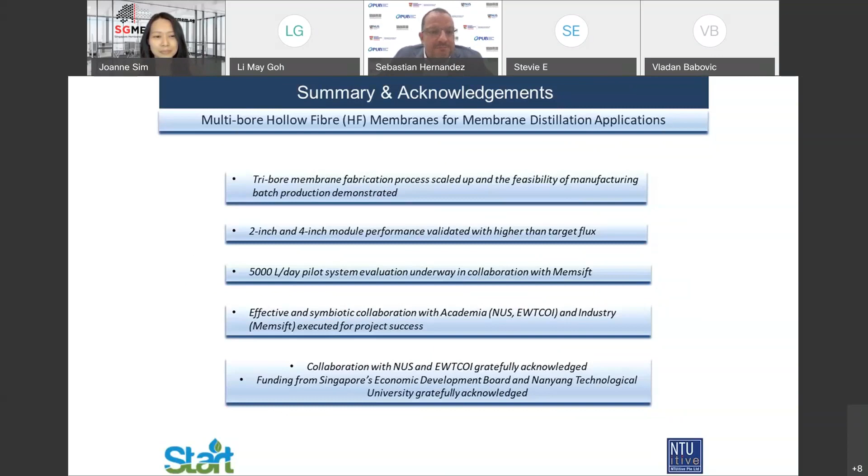As a summary and acknowledgement, we can fabricate this tri-bore membrane at an industrial scale, and it's a feasible manufacturing process. We are now between 2-inch and 4-inch module performances, producing these modules and testing them in-house and with our collaborators. The pilot system is about 5,000 liters per day with our industry collaboration. We really appreciate the collaboration between academia, NUS, EWTCOI, and the industry partners in MEMSIFT.

Thank you, Sebastian. Now we've heard three great examples on scale-up and translation projects.

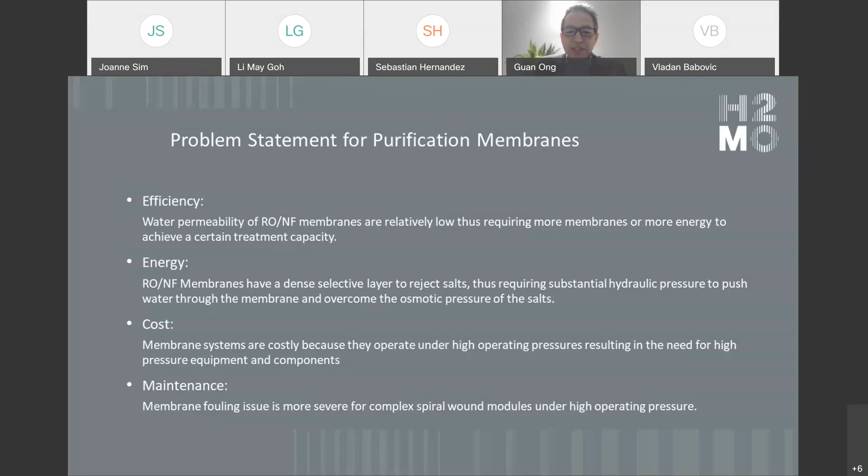However, there are problems associated with existing liquid separation membranes, including limited permeability, excessive energy consumption, higher membrane system costs, and maintenance issues due to membranes being prone to various types of fouling. Therefore, to overcome this global issue of clean water and energy, problems associated with existing membranes must be solved.

To this goal, H2MO's partner, Professor Wang Rong from SMTC of NTU, started research 10 years ago into biomimetics, an innovative design concept that draws inspiration from nature, its elements and processes, to solve our membrane problems. We look to cell membranes for inspiration. The work involved overcoming numerous challenges over the years, such as finding the right formulation of biomaterials, the stability of the biomaterials, and incorporation of biomaterials onto a substrate layer.

There were also membrane module production issues, and more — the road was long and arduous. In 2018, there was a breakthrough and success in producing the biomimetic membranes, Aquaporin-free. We were able to make membranes with different characteristics and functions using different biomaterial formulations. These functional properties include reverse osmosis, nanofiltration, forward osmosis, and membranes with specific ion selections. We call this technology bioprogrammable membrane, or BPM for short.

We are currently in the process of commercializing BPM with support from SMTC of NTU, and we intend to roll out other BPM membrane types for different applications over time.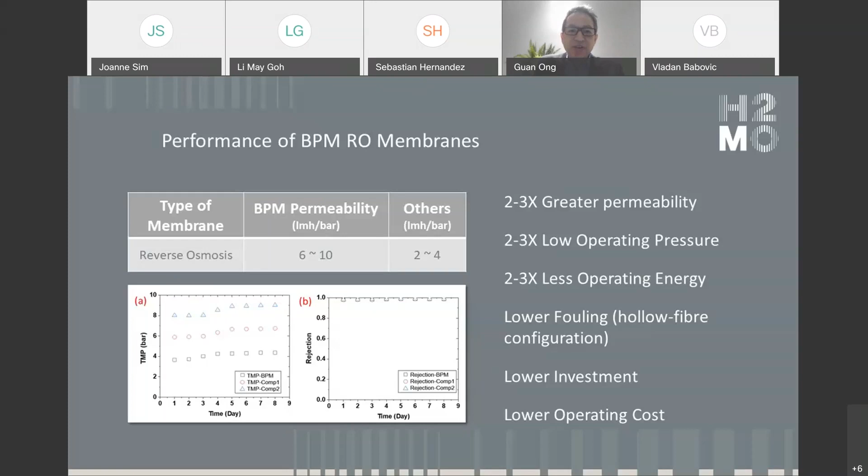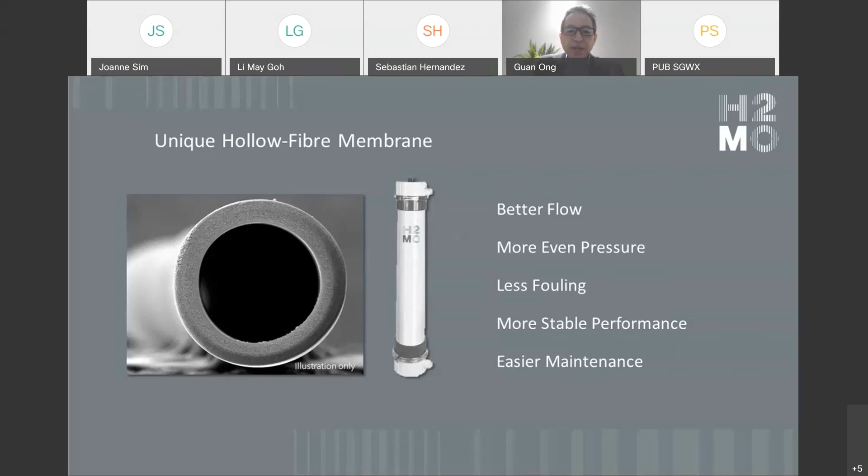Another key characteristic of our BPM RO membranes is that they are configured as a hollow fiber, as opposed to the conventional spiral configuration of most RO membranes. Our hollow fiber RO membranes offer better packing density and better physical flow and pressure characteristics. These characteristics, coupled with a far lower operating pressure, result in better anti-fouling abilities, leading to better performance stability and lower maintenance. The BPM RO is a first in hollow fiber RO for brackish water treatment.

From our demo BPM RO plant at the Singapore New Water Plant for the recycling of treated wastewater effluent, we have measured a lower energy consumption of 0.2 kilowatt hour per cubic meter, about a 50% savings in pumping energy compared to existing RO membranes on site.

Our BPM membranes are ideal in a wide range of liquid separation applications, such as potable water purification, ultra pure water purification, point of use purification, wastewater treatment, wastewater recycling, new water, zero discharge applications, seawater desalination, groundwater remediation, and concentration.

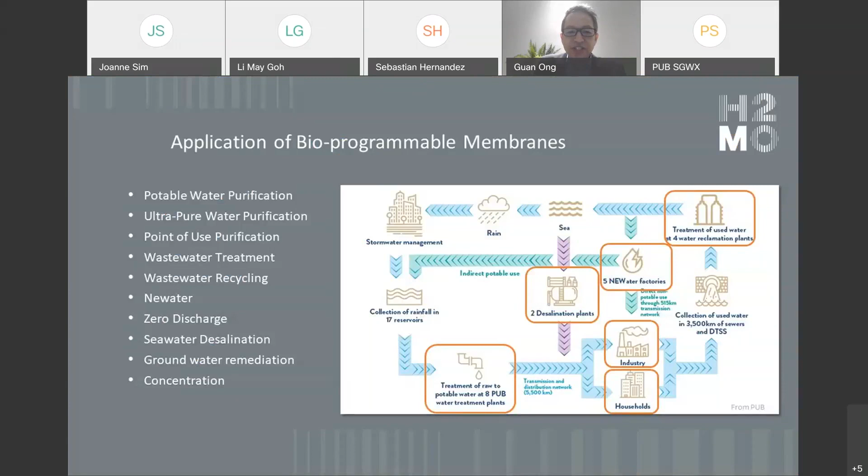H2MO is committed to providing this groundbreaking technology to the benefit of the world. Its team, with over 16 years of experience in membrane manufacturing, is currently in the process of setting up our membrane manufacturing facilities in China.

Our China facility will manufacture BPM RO modules and BPM RO liquid separation systems, and undertake further R&D into new applications for BPM RO membranes, as well as developing novel manufacturing processes with the aim of achieving full automation of our production line. H2MO is looking for partnerships in marketing channels and partners to participate in the co-financing of the rollout of this world-changing technology.

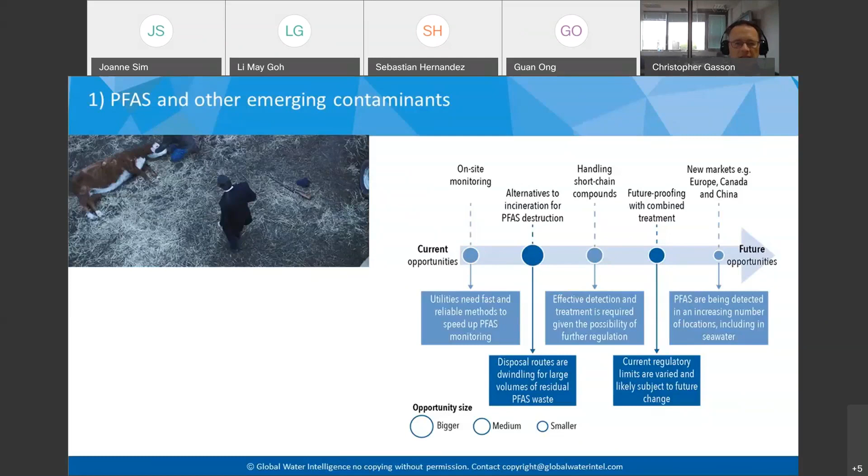In Europe, the main issue is these other emerging contaminants — pharmaceutical products, pesticides, endocrine disruptors — and we're seeing stricter regulations being pushed out in Switzerland, the Netherlands, Scandinavia, and at the state level in Germany. Again, it's created an opportunity both for membranes and other alternative adsorbents to deal with this. Can we move to the next slide?

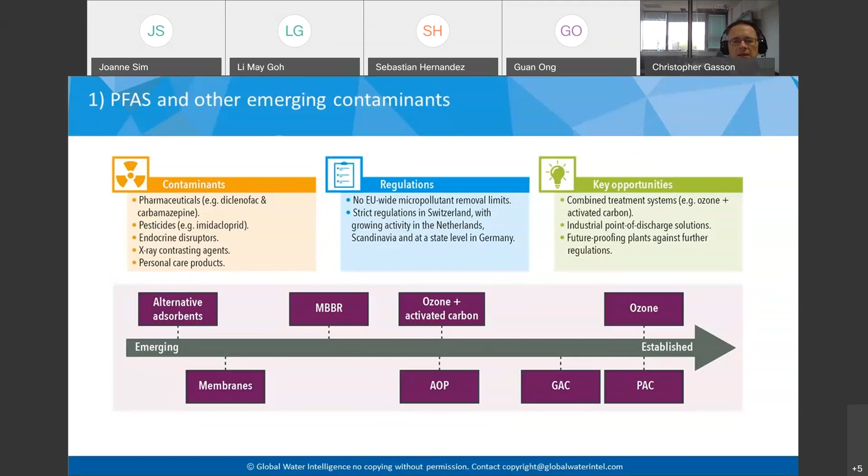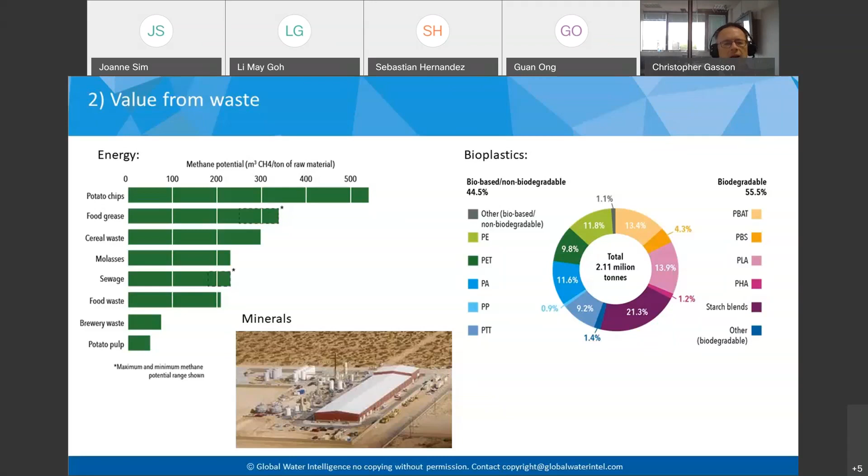Hydrogen - this has sort of crept onto the water agenda in a roundabout way, in that there's a growing feeling, I don't know whether you'd call it consensus yet, that hydrogen might be the solution for energy storage. If we can't build batteries which are good enough, why not store energy in hydrogen and move it around as hydrogen.

There are a number of different opportunities here. There's the fact that fuel cell technology and electrolysis technologies basically use the same membranes. You can see BWT, an Austrian water treatment company, has basically bet the farm on these electrolysis membranes being applied to hydrogen fuel cells, and they've sponsored this pink hydrogen fuel cell racing team.

Other hydrogen opportunities people are looking at: the fact that hydrogen literally means water carrier - it needs water. So co-locating hydrogen production with water utilities makes some sense. I think we're seeing a bit of action on that in Australia - I'll look at that on the next slide.

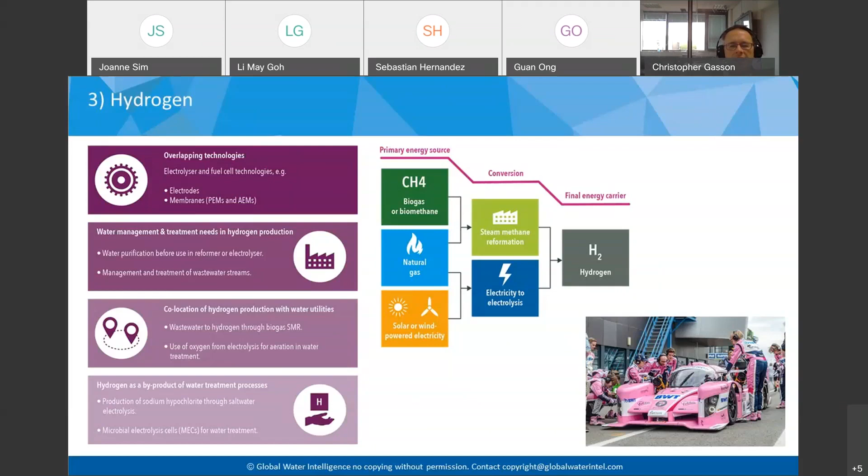Just the next slide, please. You can see here some of the hydrogen ideas, pilots and what have you that are being undertaken around the world. It's still very much a cottage industry, but we're certainly seeing some interesting hydrogen-based programs. I'm looking to the NEOM project in Saudi Arabia, and there's a wastewater project in Australia which is going to really show the way for water.

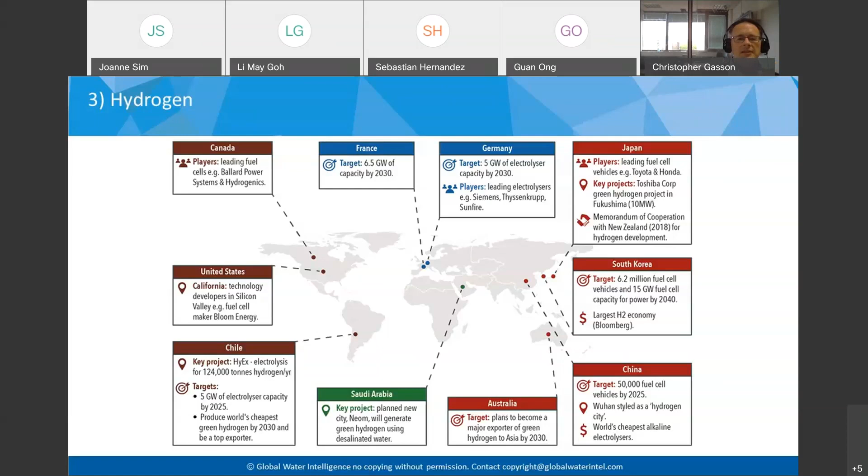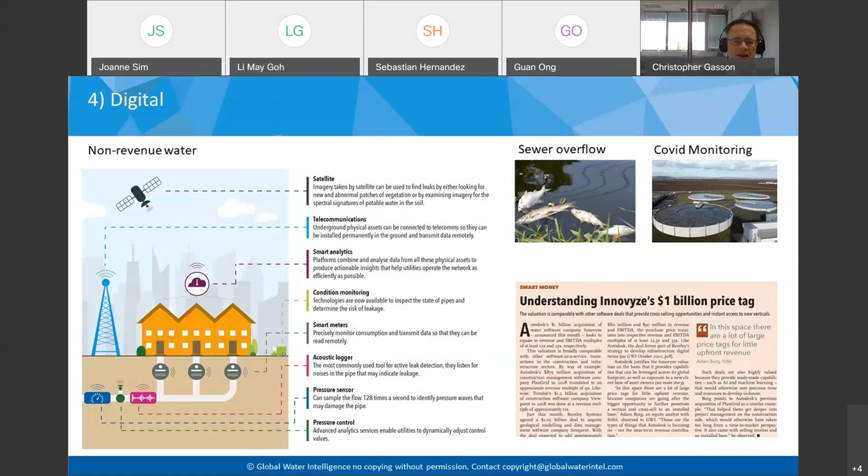Just a remark here - it's the most crazy price we've ever seen paid for a water company: the sale of Innovyze, a company which started out doing hydrological modeling. It sold for basically 10 times revenues, which is extraordinary. I guess that just shows how much people expect of the digital thing in the water sector. Can we move to the next slide?

I seem to remember being to, I suppose it was the first Singapore, the precursor to Singapore Water Week in 2005 with the IDA World Congress there, and one felt that Singapore had decided it had spent an awful lot of money on upgrading its water resources system, and was determined to get a technology dividend from that - that it was actually going to be able to create an export industry based on the amount it was spending on water. It's only really now that one can see, I suppose it's sort of 16 years later, that this dividend is real.